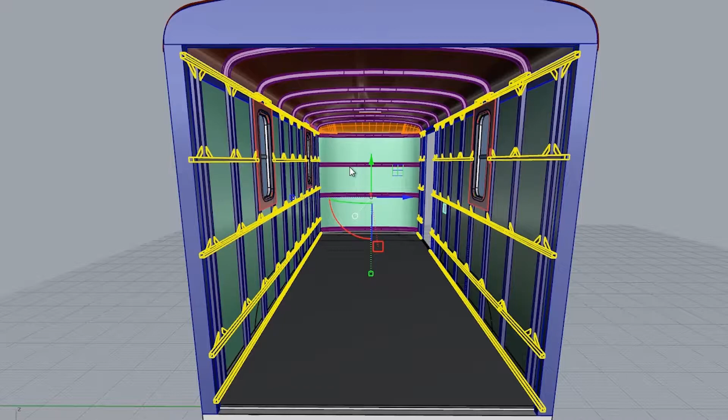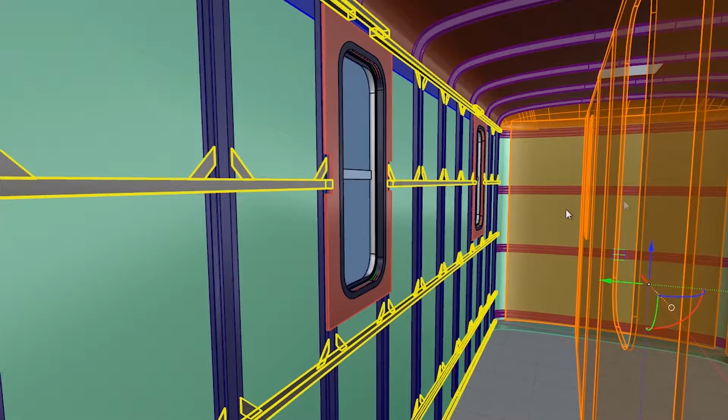This trailer was designed to be lived in full time in all four seasons. Due to the cold weather, I wanted to add extra insulation in the walls and ceiling, so I doubled the thickness of the walls using furring strips made out of 1-inch tube steel. This gives me 2 inches of insulation on the walls, and it will also provide a point for me to weld on bolt locations along the wall.

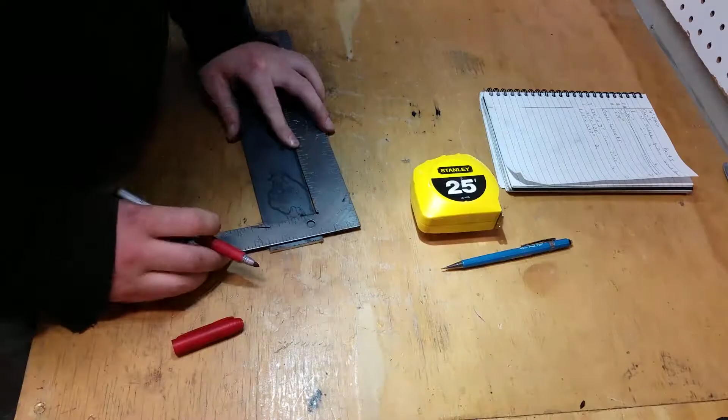So I picked up a bunch of steel from the metal yard. I had the nice guys at Standard Steel cut it up for me to fit in my truck. I got it home and piled it all up haphazardly in the garage, which reminds me I definitely need a steel storage rack. So it's time to start planning out where the cuts are going to be for the gussets and the tube steel and get to work on the chop saw.

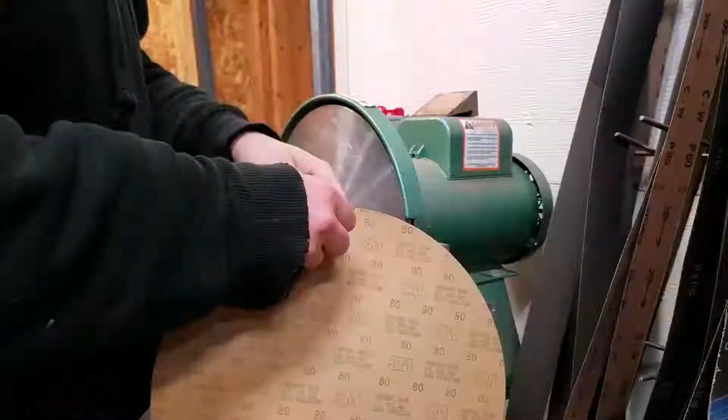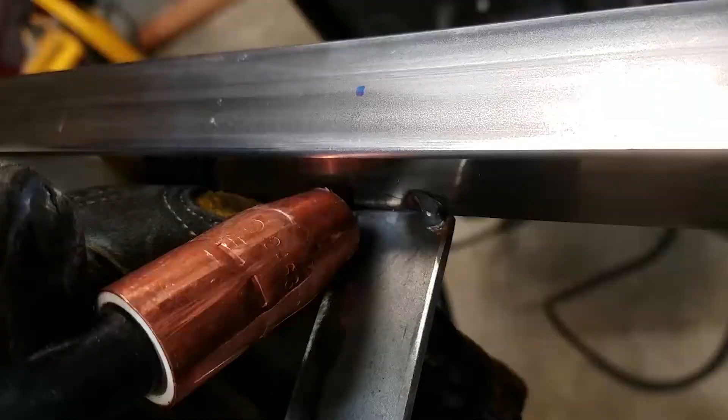For more accurate stuff, I grind it on the disc sander, or sometimes I'll employ a jeweler's saw to shape metal. I welded the gussets on in the shop before bringing the furring strip into the trailer to weld onto the frame.

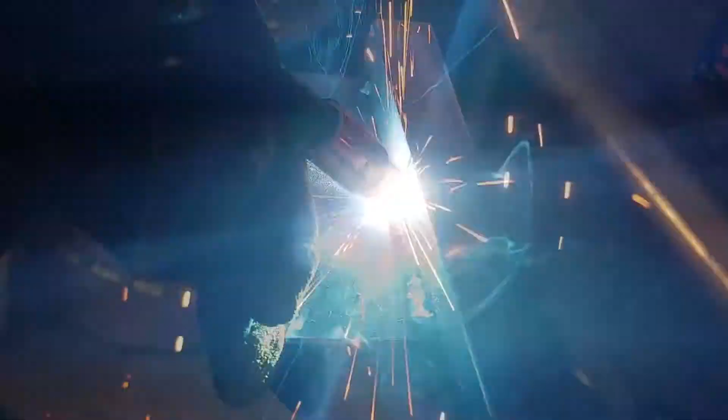Enjoy my half-assed attempt at a montage.

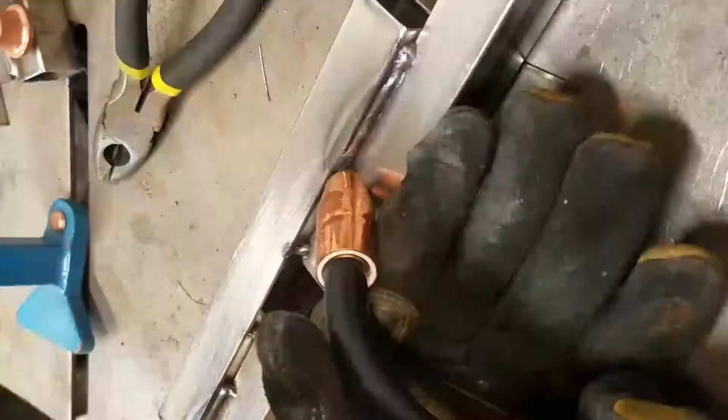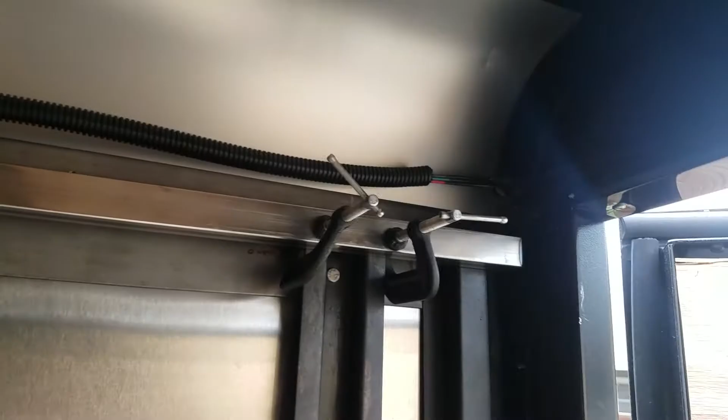I then used a bunch of C-clamps to mount the square tube onto the wall studs. Now you tack and weld into place.

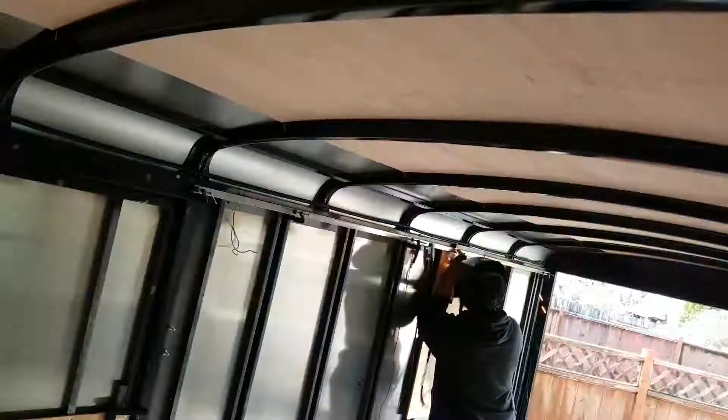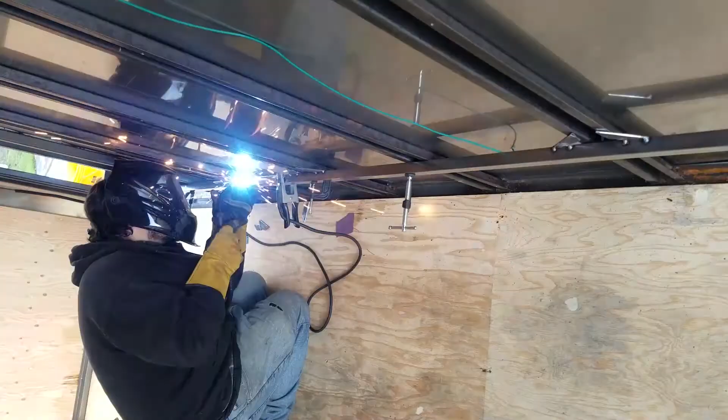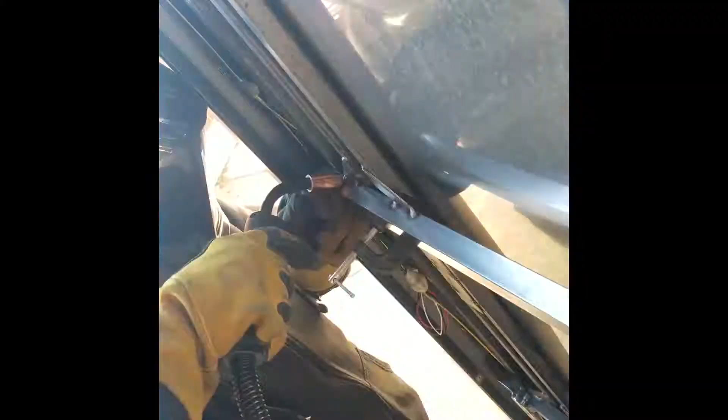I wire brush all the welds real good because I'm going to be coating them later. I plan to have a bunch of these bolt locations on the furring strips so I could have heavy duty stuff hanging off the walls.

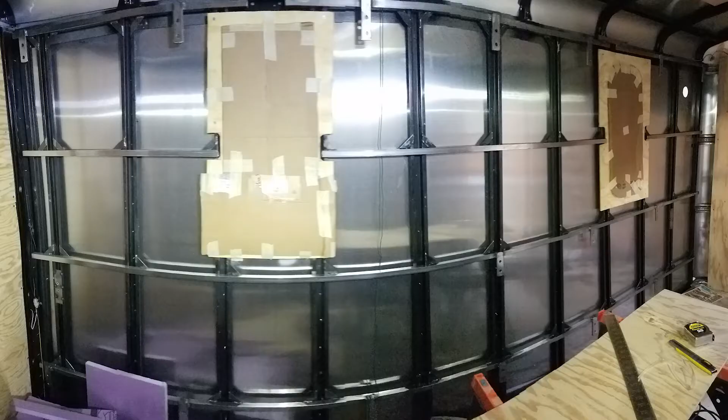The furring strip isn't actually a straight across piece because there's a bit of funny business happening with some differently shaped vertical studs, so I had to kind of splice it like this. Here's what they look like all finished.

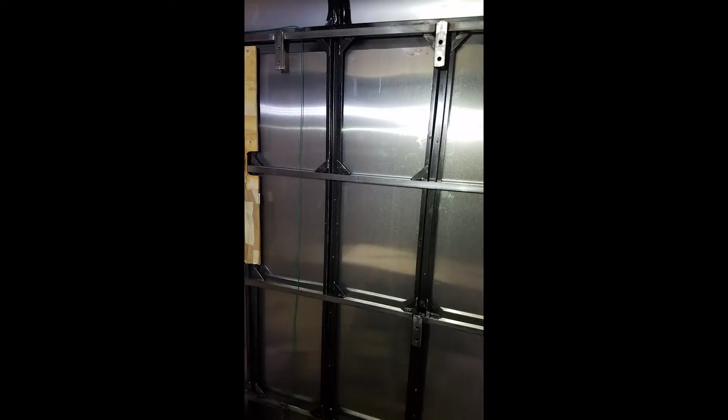You should note my generous use of these gussets. I mentioned in the window episode that they can't be put too high, and this is why, because I need space for these furring strips right above the wooden ring around the window, so I barely fit it in there.